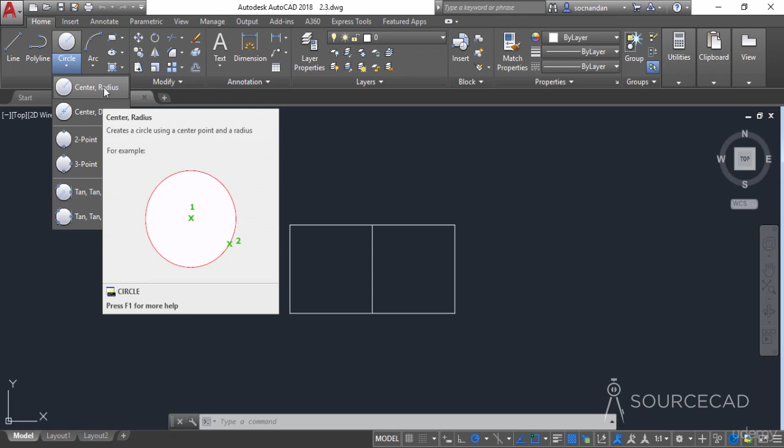So the most basic method of making a circle is the center radius. Now in order to select the command, you can click on this center radius option, or you can also use its command equivalent CIRCLE or C. Now after starting the command, click at the point from where you want to start the circle, and in this case we want to start the circle from this midpoint of this rectangular geometry. So I'll click at this point and this will be the center of our circle.

Now look at the command line and it prompts you to specify the radius of this circle. So let's enter the radius of this circle as 1 unit and press enter. So now here we have it, the circle with radius of 1 unit or a diameter of 2 units at the center of this line.

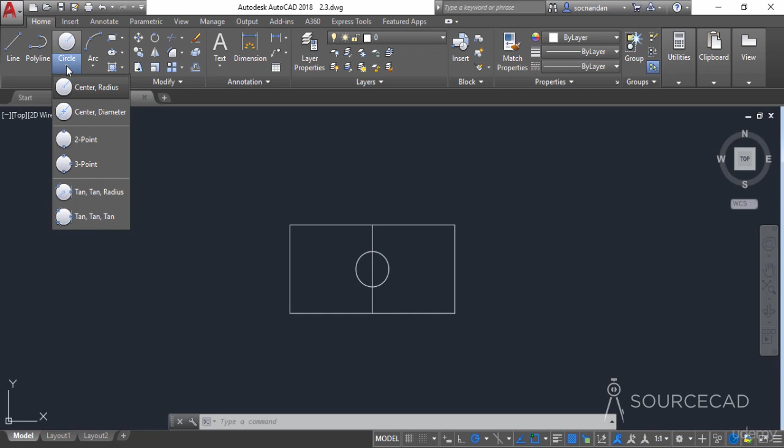Now let's look at the other method of making the circle. So go to this circle flyout and select the center diameter, and in this case we need to specify the center first, and when you look at the command line you'll notice that this option has been overridden and we have this option now which says that we need to specify the diameter of the circle. So let's type 3 as the diameter and press enter, and now here we have it, the circle with a diameter of 3 units or a radius of 1.5 units.

You can also start the diameter option from this center radius command. So click on this center radius. Now click at this point or any other point to start the circle, and now you can click on this diameter option on the command line, and now simply enter the diameter value. Let's say that we want to enter 4 as the diameter value and press enter, and here we have it, the circle with a diameter of 4 units or a radius of 2 units.

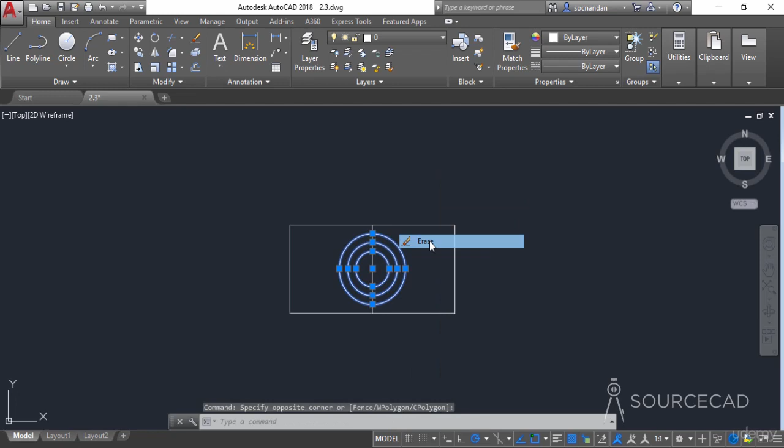So let's now erase all of these circles and now look at the remaining options here. So the next option is a 2-point circle. So what if we want to make a circle that connects 2 points, for example the end points of this line? So here we can click on this point and then click on this point, and here we have the circle, and this line will act as a diameter for the circle.

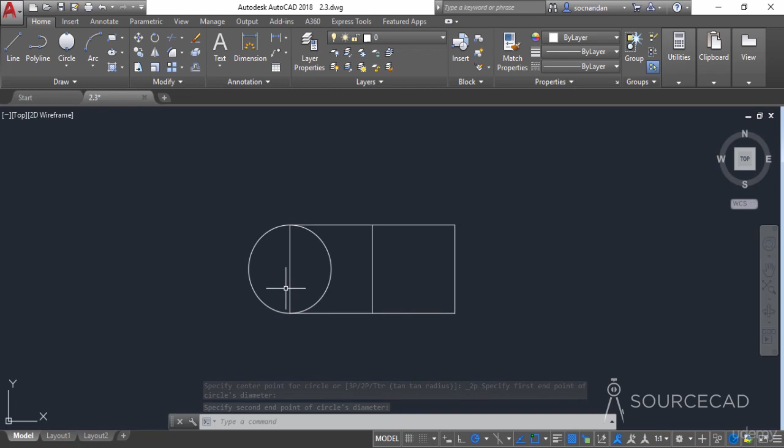Now let's click on this flyout again and select the 3 point. Now in this case we need to specify 3 different points. So I'll select here the first point. Now select the second point here, and now I'll select this point, and this is the midpoint of this line. So I'll click on this point, and here we have it, the circle on 3 different points. So this circle will essentially pass through these 3 points, and the radius of this circle will be decided based on the geometry here or based on the points on which we click.

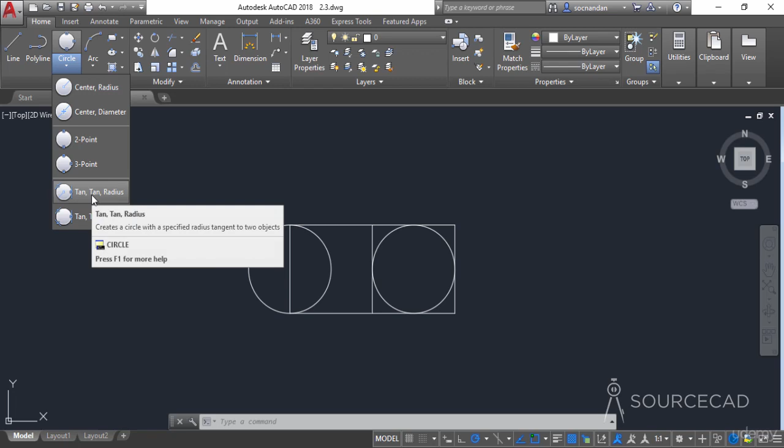Now let's look at the remaining options here. So now we have one more option here, which is tangent tangent radius. So I'll select this tangent tangent radius, and now let's select any of the geometry for the first tangent point. So click on this circle. Now click on this line. So now the circle will be tangent on this circle and on this line, and now we need to enter the radius. So you need to enter a radius which will be appropriate for this geometry.

So I'll enter 2 here and press enter, and now when you look here you'll notice that this circle is tangent on this circle, and this circle is also tangent on this line, and the radius of this circle is 2 units.

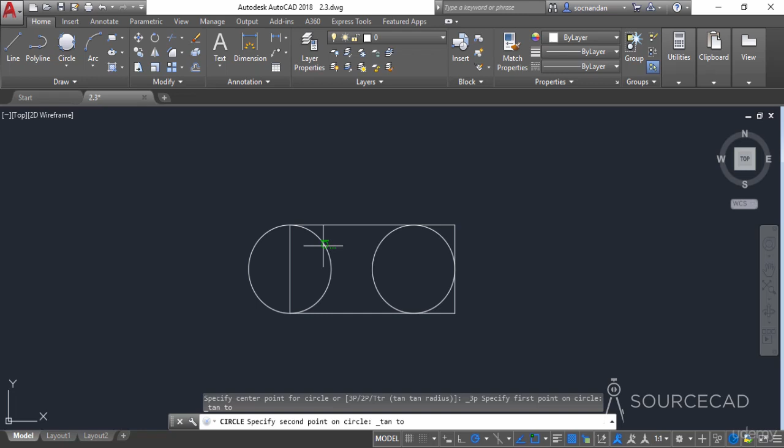Now what if we want to make a geometry in such a way that it's tangent on 3 different geometries? For that I'll first erase these 2 geometries, and now we'll make a single circle which is tangent on this line and on these 2 circles. So for that I'll select the last option, which is tangent tangent tangent. Now click on the first circle, the line and the circle, and here we have it, this circle is tangent on both of these circles and also on this line. So these are the different ways of making a circle in AutoCAD.